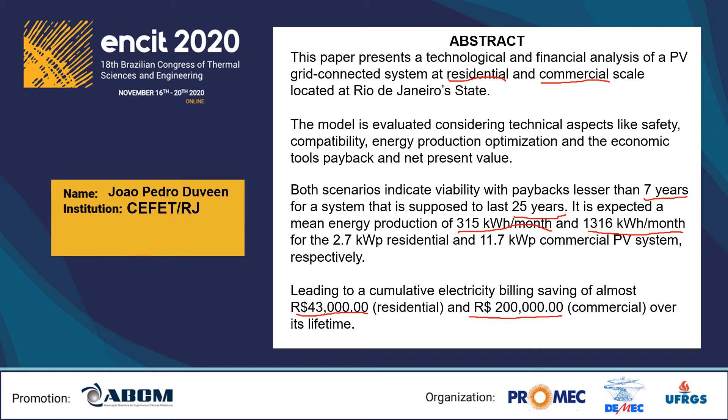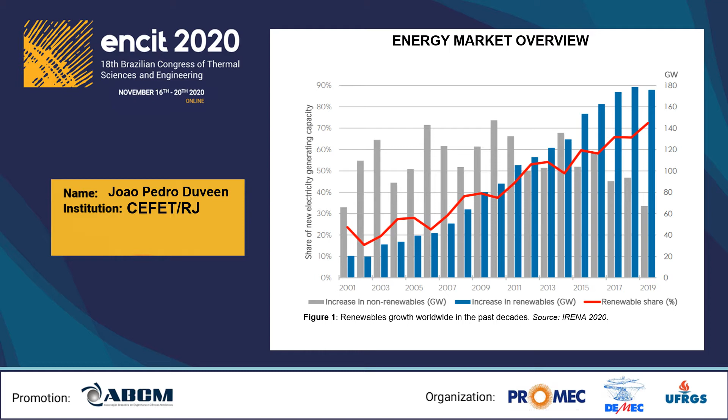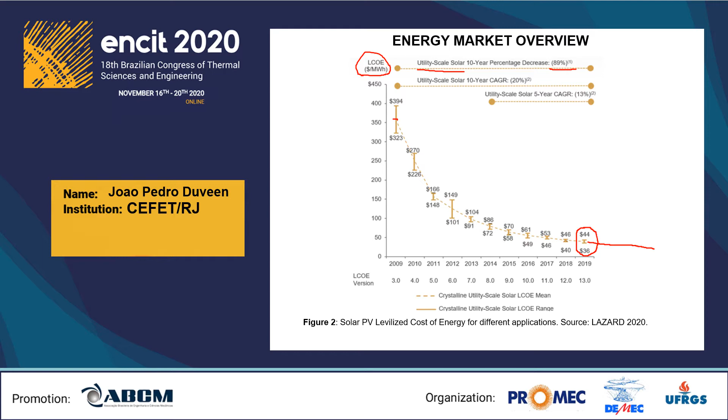So considering a scenario of breakthrough technologies and a higher demand, prices should go even lower in the following years. Moving on to PV fundamentals, in order to determine the viability of the system, two aspects should be taken into account: the region's solar resource, and which PV technology to use.

And regarding the PV technology, it has to be known if the system will be connected to the grid or it will be an isolated system with batteries. Also, the type of technology used in the solar cells is a very important aspect. For this scenario, we are considering both systems to be grid connected, so we don't need batteries here, just the PV modules, inverter, the net metering, and all the systems should be connected to the grid.

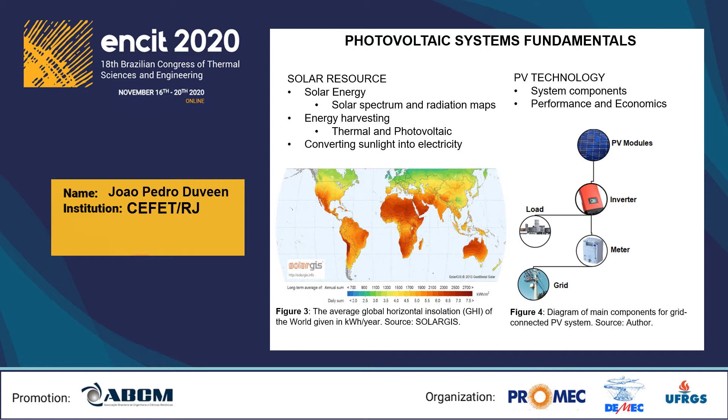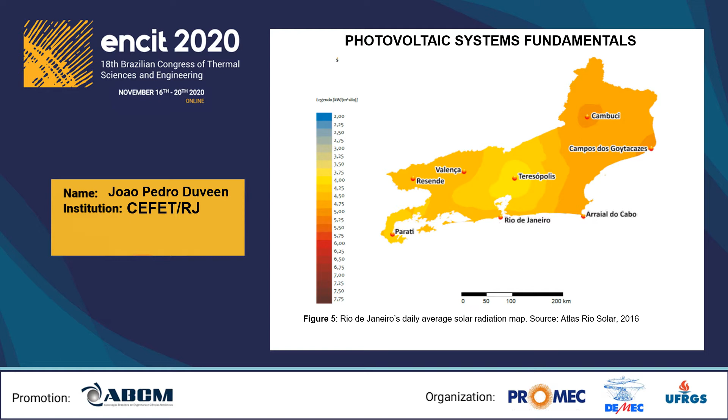So for this paper simulation, a 5 kilowatt hour per day installation was assumed, which is present in most of Rio's area. So the methodology used to determine the viability is based on the initial investment and energy output provided by the system. PV costs in Brazil for the grid-connected system should be around 6 Brazilian reais for the residential system and around 4 Brazilian reais for commercial systems.

The capacity of the residential and commercial systems of this study is 2.7 and 11.7 kilowatt peak, which gives us here about 10 modules, and here it's something around 36 modules.

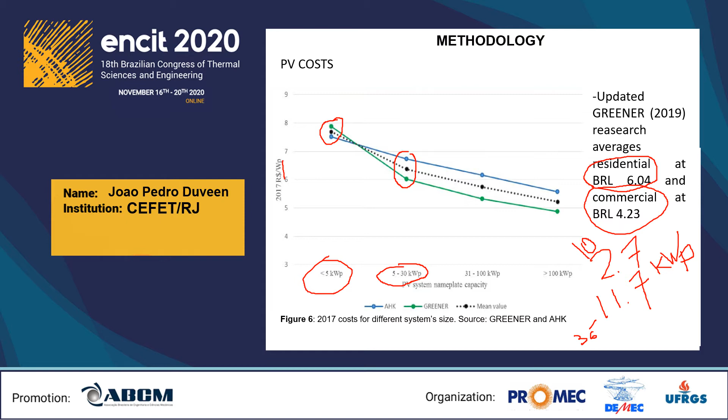So to understand the PV profits, the cash inflow can be obtained knowing the annual energy produced, which depends on the system nominal output, which will differ between the commercial and the residential application; the performance ratio, which is industry standard 70%, 75%; the in-plane irradiance for Rio, which we assume to be 5 kilowatts per meter square; and G here is the Earth reference irradiance.

So multiplying the energy output by the retail price of electricity, which is pretty high in Brazil, same as California in the US, and multiplying by the electricity taxation. So every year we expect the electricity in Brazil to increase around 9%. And of course, there is a degradation factor.

So the derating factor of the system is expected to be minus 0.5%. So let's say you have a module of 16.5% efficiency. So the year after operating, this should be 16, and the year after 15.5, and so on.

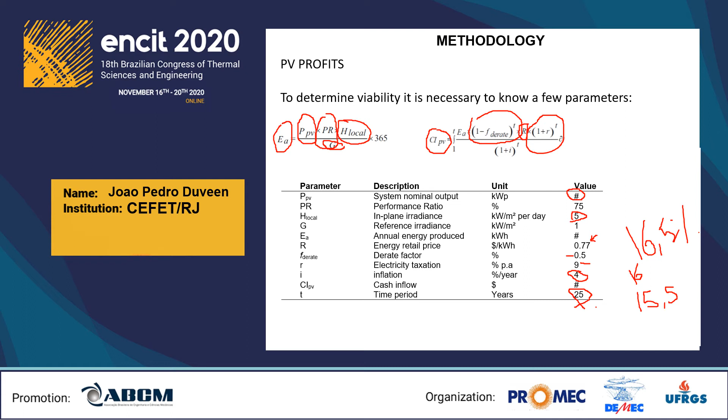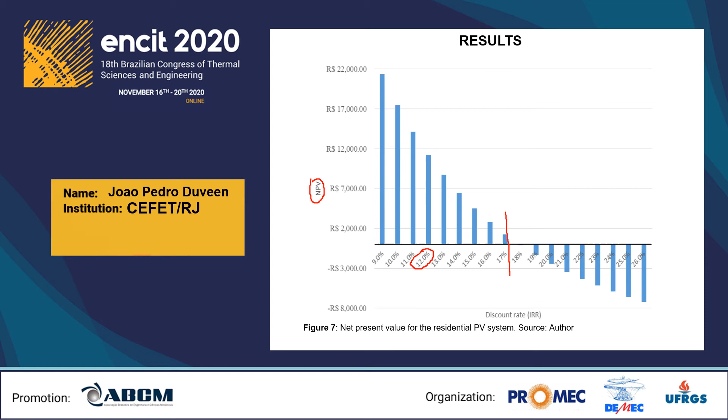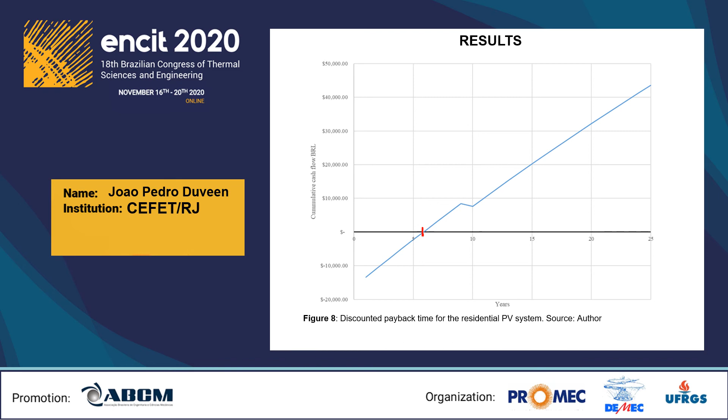So this graph here shows us the payback for the residential system. The expected payback should occur in 6 years of operation, and we can see here the break-even point. So the initial investment is something around 13,000 Brazilian reais, and with the cash inflow, this is the moment the initial investment is paid. So it's a very good scenario. The world's average is around 7-8 years, because the payback relies a lot on the solar resource.

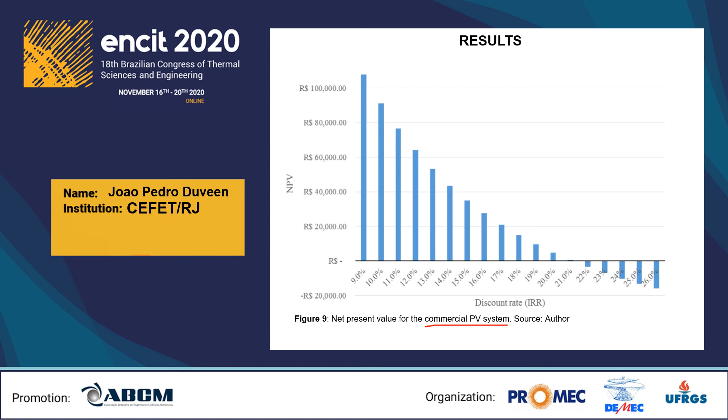So moving on to the commercial PV system, we expect a more feasible project, due to the lower costs mainly. So NPV is positive below 20% of discount rate. So as I mentioned before, Selic is around 12%. So we definitely have a profitable investment here.

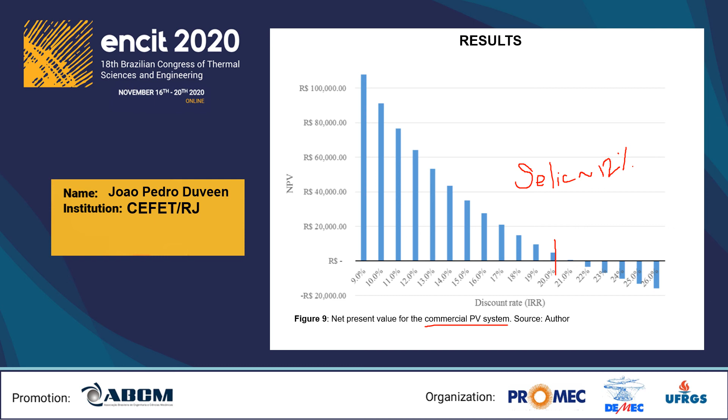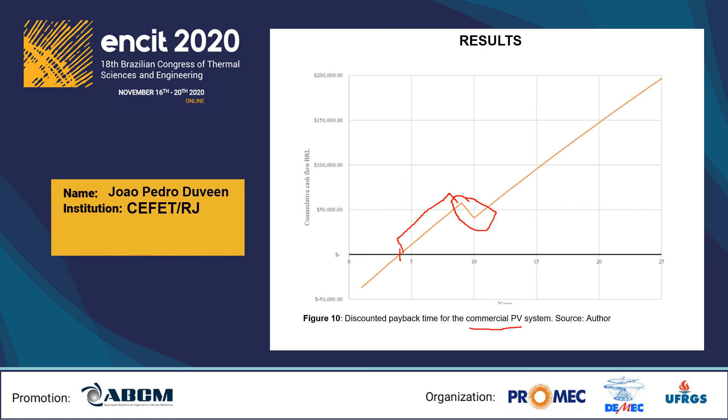So the conclusion of this paper is that Rio and most of Brazil's area provides a great solar resource, and the technology costs break even in less than 7 years, for a system expected to last 25 years. Further studies regarding distributed generation policies should be undertaken to implement an effective transition from the current net metering to a feed-in tariff system, leading to more acceptability among the population.